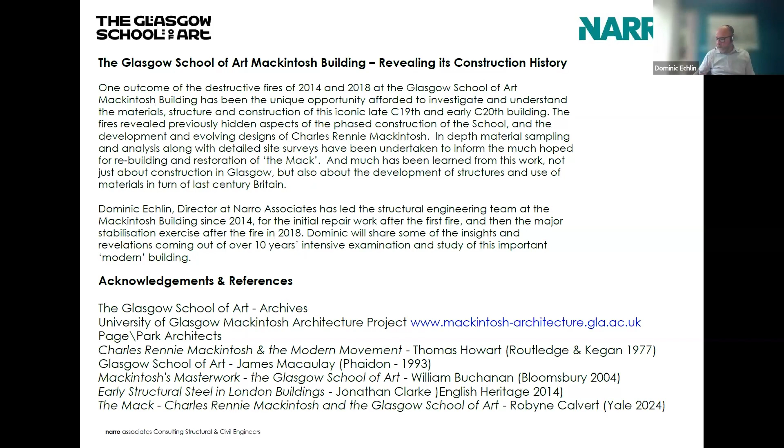In most people's minds now, sadly, the Glasgow School of Art is identified with the events of 2014 and 2018, the two fires.

And in some ways, I think certainly at the moment, such dramatic events perhaps obscure the building in terms of how interesting it is and its importance, not only from an architectural point of view, but also how interesting it is from a construction and structure point of view. So hopefully this evening I'll be able to take you beyond these rather dramatic and awful images to show you some of what remains, and also some of the fantastic information that we've gathered as we've worked on the recovery of the building.

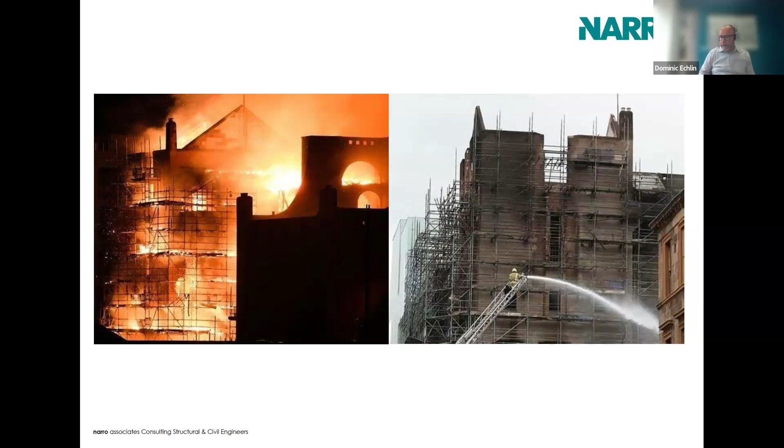The Glasgow School of Art as an architectural design has been recognised as being seminally important in 20th century and modern architecture for quite some time. In fact, it was Nicolas Pevsner in his book Pioneers of the Modern Movement, published in 1936, who was really the first person to recognise the importance of the building, in fact declaring it was the first modern building in Europe, which I think even at the time Pevsner was saying that might have seemed to be quite an unusual thing to say.

In most people's minds, I think we associate the Glasgow School of Art as being an arts and crafts building, harking back more perhaps to later 19th century design. But there are many elements of the design, and as I'll illustrate this evening, many elements of the construction and the use of materials that definitely place the building as being a modern building.

Slightly more negatively, Morton P. Shand said at about the same time that whilst recognising it was the most original architectural design of its day, he felt that structurally the building was behind contemporary engineering practice. I only recently came across that quote, and I think now that perhaps that's something that needs revisiting, because it's definitely not as a building that far behind much of the contemporary work happening both in Glasgow and the rest of the country.

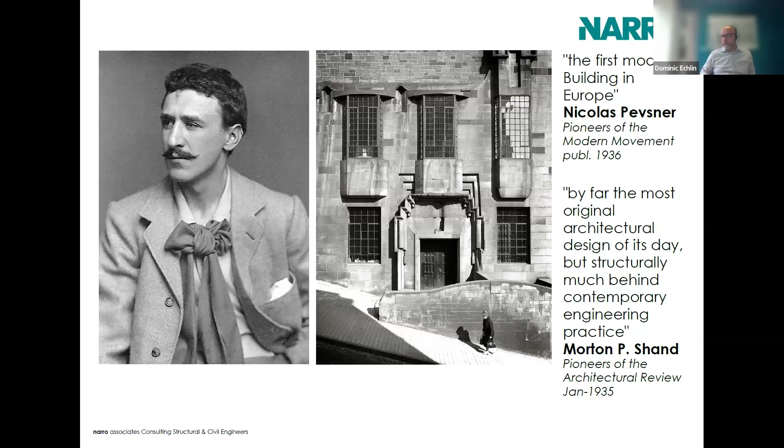And the fascinating thing about these studios is that whilst they were designed as separate spaces, they could in fact all be opened from across an entire half of the building into one single space. There's a very clever system of suspended partitions - the upper part suspended from the beams above, and the lower part entirely demountable, so that all of the studio spaces could be opened up into one large volume.

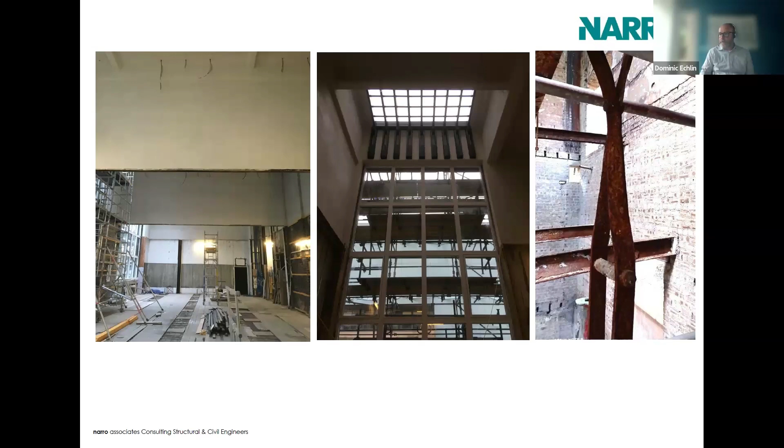As part of the work that we've done since 2014, we've done a huge amount of investigation of materials, and basically almost every single material in the building has been carefully identified and analysed in order that we understood what the materials were. Even our team going into the project made some assumptions that perhaps didn't turn out to be the case. The purpose of the material analysis investigation was to understand very clearly the properties of the material, to some degree how those properties might have been affected by the fire, so that we could then take that information and use it to inform the repair and recovery of the building.

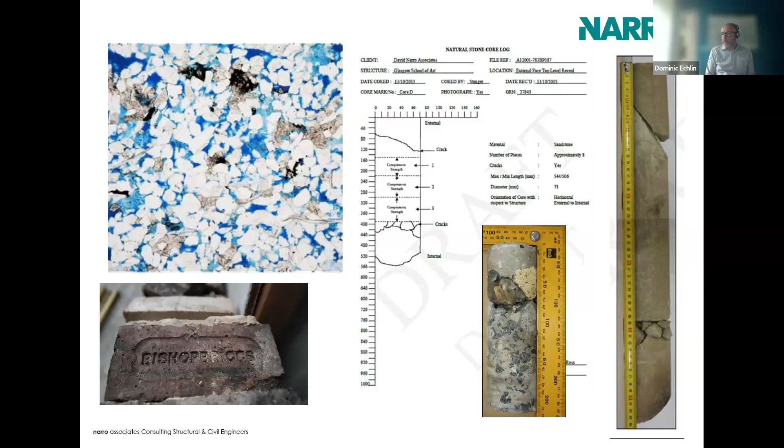I'll run through a bit of the history of the building, because it in itself is quite interesting. In the process of investigating and looking at the building, we've found some very good evidence of how it was built and developed during its construction. The idea of having a dedicated art school building for Glasgow developed in the 1870s and particularly the 1880s, at a time when Glasgow was booming as a city, and a recognised arts community was developing in Glasgow.

And so the notion of having a dedicated arts school, a new building, became increasingly important. It was seen perhaps not as we might see an art school today, as being just for artists producing work, fine art, etc. It was very much seen as being an important part of the commercial and productive development of Glasgow, having an art school covering all of the arts disciplines, not just orientated for producing art for rich patrons, but also for producing products and designs that could be used in Glasgow's manufacturing.

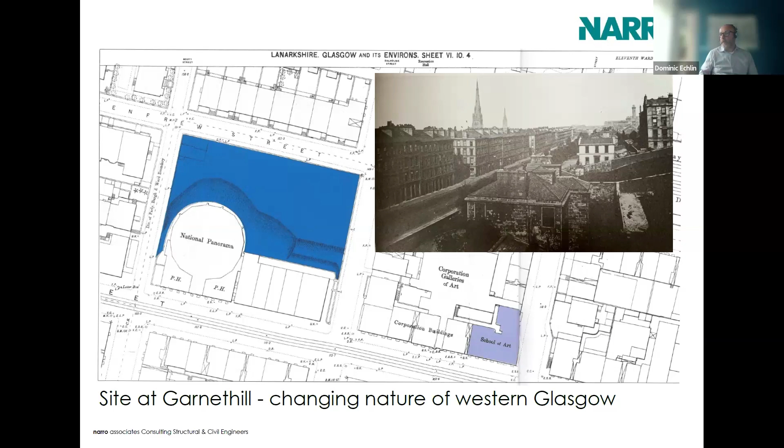The board got round this rather cleverly by saying, present us with an overall scheme and then tell us how much you can build for £14,000. This is why the development of the building then proceeded in a series of phases. The overall competition for the design of the full school was won by a firm called Honeyman and Keppie, but their chief draughtsman and the person responsible for the design was a young Charles Rennie Mackintosh.

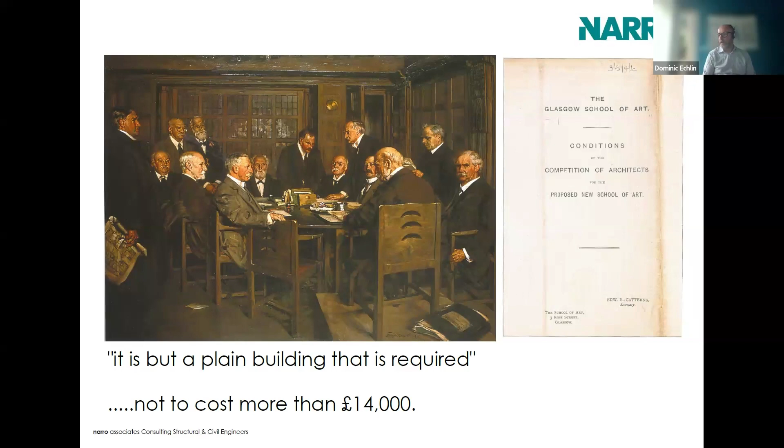These are some of the drawings he prepared for that competition entry - a full scheme for the whole art school, developed in quite a lot of detail, not just the external elevations but even some elements of how the building was to be constructed. You will see elements of this original design in the finished building, albeit that the design subsequently went through some quite significant changes over the 10 to 15 year period and the two phases of construction.

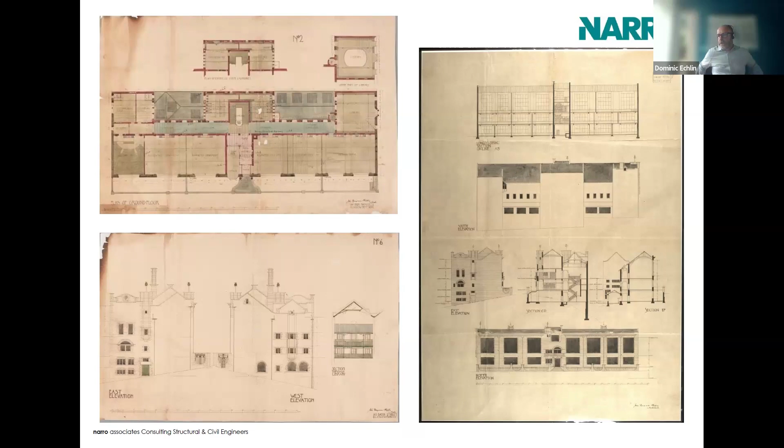Some of the elements of the design which I touched on earlier, marking this as a modern building, are there in that original design. Certainly the concept of these large internal spaces, uninterrupted spaces, generally north lit, were part of that original design. This image is of the architecture studio as finished, occupying the raised ground floor space on the western half of the building. This was typical of the large studio spaces that formed part of that original design.

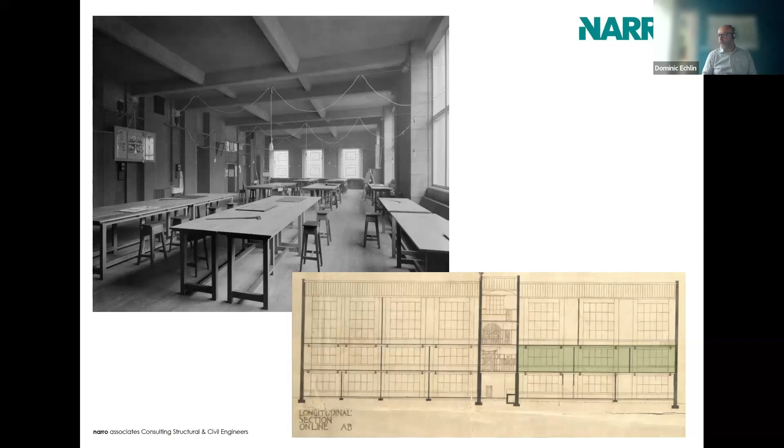As I said, there was this restriction on the budget. Initially the school only had £14,000, so they were forced to accept that the building would be built in phases. What Mackintosh was able to achieve for that £14,000 was construction of the eastern end of the building, the three-windowed studio spaces, the main entrance hall, and at the rear the southeast wing, which contained the original boardroom - the room that Andrew referred to - and the main gallery space within the building, which was often also referred to as the museum.

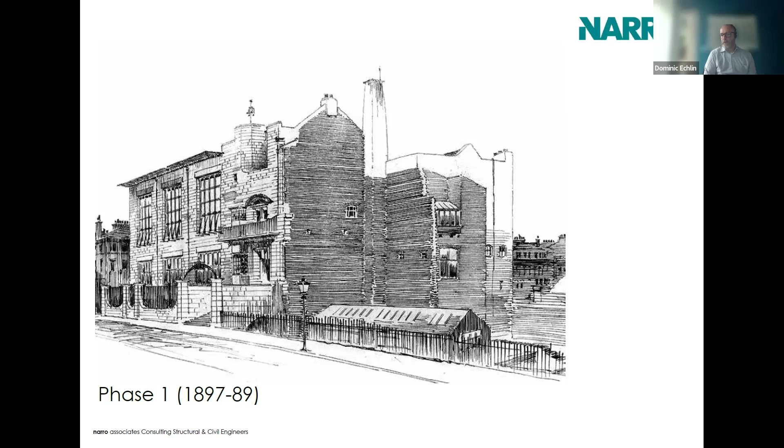The second phase of work progressed a little under ten years after the first phase, once the board had raised the further funds needed. This diagram usefully explains how that development was then completed across the second phase. It obviously included the western half of the building, but it also included some quite significant changes to the eastern half of the building.

In particular, as originally constructed, the eastern half had a timber roof, which was removed, and to match the western half, an additional story of studio space was added on top of the building. This was in part due to the success of the school and it needing more accommodation relatively quickly. To achieve that extra story, the existing timber roof was removed, a concrete filler joist slab was put across the building at what is now referred to as the second floor level, across both east and western halves, and the extra story of north-lit studios added.

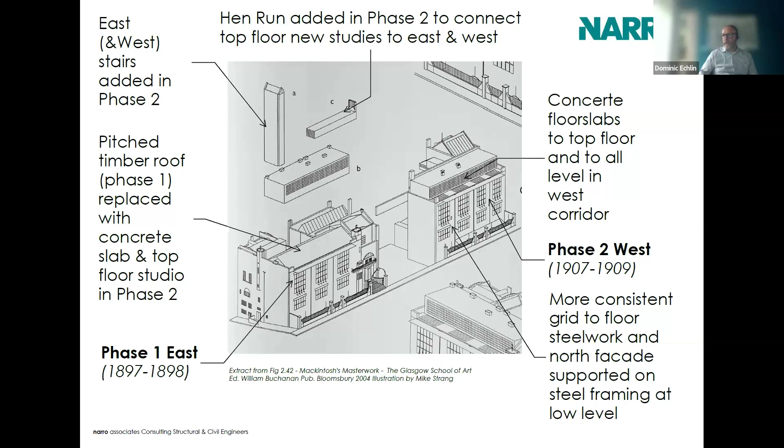The major change is a much more consistent steel grid to the floors in the western half of the building, and in fact part of the north facade actually supported on a steel frame of beams and columns at low level. So we're seeing over this period not only changes in the design of the form of the building, but also changes in how the building was actually constructed and the materials used.

So these are just a couple of images around that construction period. Interestingly, there were almost no images of the building during construction. There's an excellent set of high quality photographs, I think by a chap called Bedford Lemere, who I think took them originally for Country Life, or certainly they were used in Country Life magazine very early on. But we haven't really found any images of the building under construction, which I find interesting.

Perhaps it's because construction in Glasgow at that point wasn't thought of as being particularly out of the ordinary and therefore worthy of someone taking a photograph. But if anyone ever turns up a photograph of the Glasgow School of Art being built, I would be very, very interested. But these are a couple of early images.

One is a postcard showing just the eastern half of the building, and on the right is a rather nice Muirhead Bone sketch showing the library tower under construction.

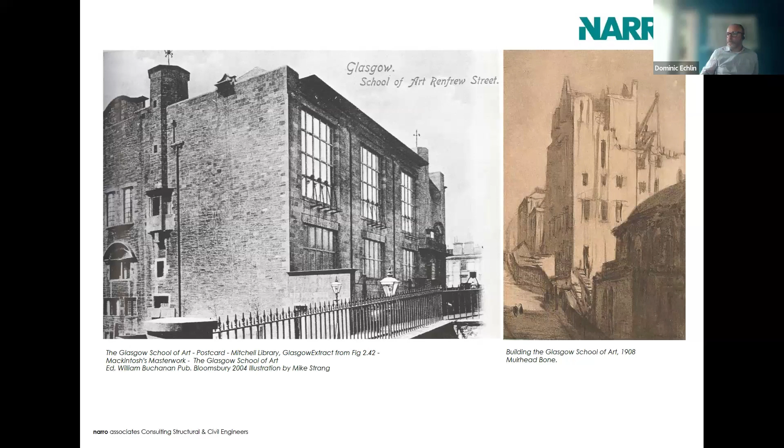And we can see some of the evidence of those sort of design changes in the building. Some of them were elements evident before the fire. The bottom left-hand image is in the east stair, where you had this rather curious arrangement of the east stair, which was added after the eastern half was built, sort of wrapping around what had been the external windows to one side of the director's boardroom.

But with the destruction caused by the fire, we can actually see more of the detail of the sort of changes in that same bit of wall, with original arched openings being altered and raised to form a doorway from the stair landing into the space. And with the removal, and in some cases the falling away of the finishes within the stair, actually the original external harling or render on that elevation around those now blocked over windows is still on the wall underneath the later finishes on the stairs. There's lots of other examples of these changes and adaptations to the structure and construction that have been revealed following the fires.

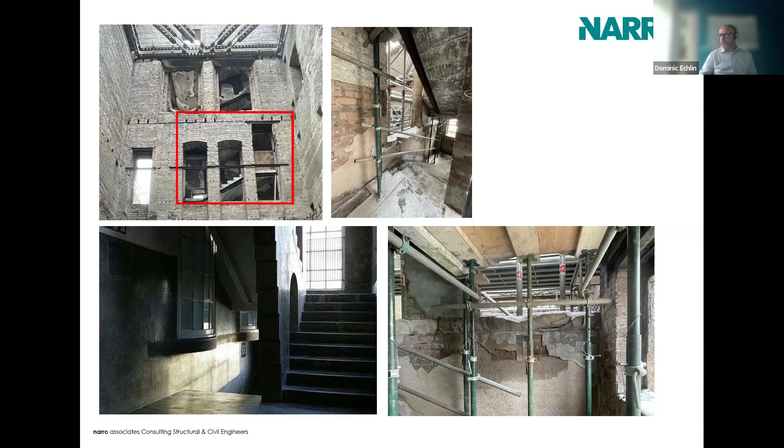One of the most interesting things I think about the building is the sort of various types of material and construction that are used in the building.

And unlike Mr. Shand's quote, I think this is very much a building of its time. As we've investigated the construction and the materials, it's become very clear to us not only was there a great deal of change and adaptation in construction practice around the turn of the 20th century in Glasgow, but that Mackintosh, as an architect, was evidently extremely interested in construction materials and technology, and was obviously very keen to use the most up-to-date forms of construction and materials that he could get his hands on.

The same also applies to other types of building technology. I haven't included in tonight's talk details about the electrical systems in the building and the heating and ventilation, because they are a talk in themselves. But Mackintosh was incorporating within the building and adapting the construction through those design phases, all these new materials and ways of building.

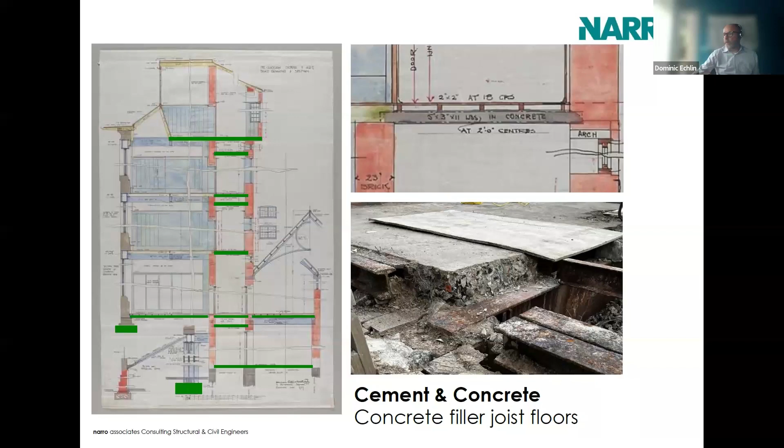What we also see in the western half of the building is that parts of the structure, particularly the north facade, are supported more on steel framing. There's more use of concrete in the foundations of the building, presumably because of the much increased point loads from those columns and frames.

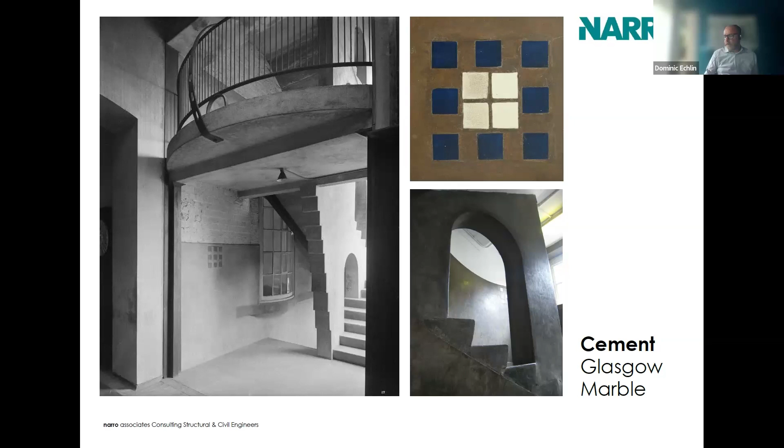The other key area where Mackintosh uses a cement material is on the south facade of the building. If you cast your mind back to that first slide where I showed the north facade, the south facade is radically different. It's been compared to a bit like a Scots tower house, in this extensive use of render, with only very little bits of stone at high level, and the render wrapping over window sills and wall heads.

For this exercise, Mackintosh uses almost a pure cement render, because at the time this produced this amazingly clean and unifying texture to the surface of the wall. Traditionally, this would have been done using a lime render, but Mackintosh wanted this very clean, uniform finish, and so he adopted a sort of almost pure cement material.

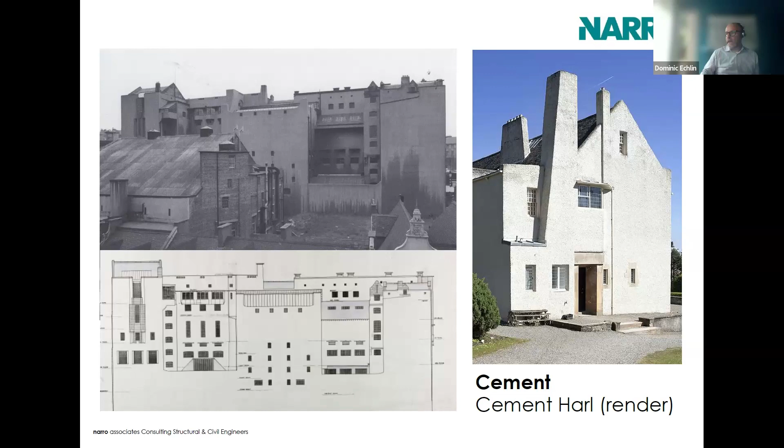This has caused a certain amount of problems, particularly at the Hill House, where they are struggling with the problems of damp and water ingress that come with using such a hard cement render.

One of the interesting changes we can see in the development across the two phases of the building is the initial use of cast iron to form some of the larger structural elements, particularly the lintels over the large north facade studio windows. There is only cast iron on the eastern part of the building. By the time of the building of the second phase, larger steel sections were commonly in use, so the use of these large section cast iron beams isn't followed through.

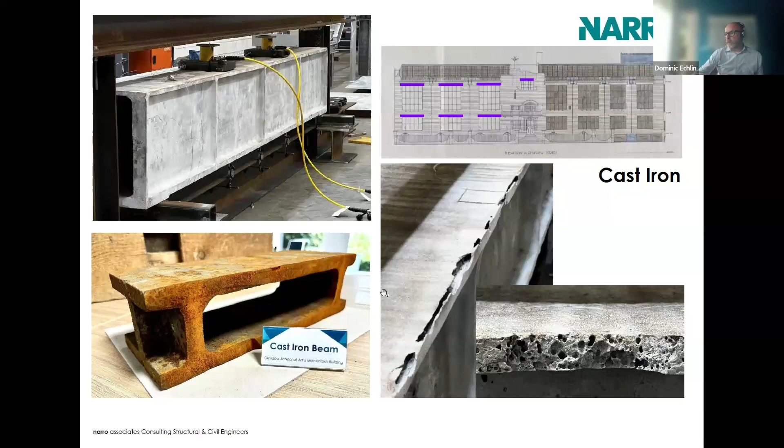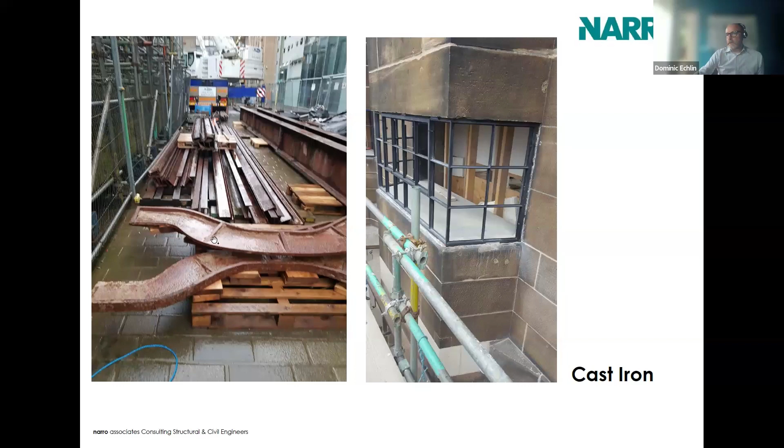We found some interesting use of cast iron in other places we weren't even aware it was there. There are a number of points on the building where there are windows with large cantilevering blocks of stone immediately above them. With the dismantling of parts of the facade at high level, we found, not immediately above the window opening but in some cases one or two courses above, carefully shaped pieces of cast iron acting as relieving lintels or supports to hold the projecting stonework above those window openings.

As I said, there is quite a significant development over the two phases in terms of the use of steel in the building. There is some steel used in the eastern half, although it was obviously limited by what was available in the mid-1890s. The main floor beams in the eastern half, supporting the studio floors, are steel, but they are fully compound sections made up of plates and angles riveted together.

By the time of the construction of the second phase of the building, we're seeing that very definite transition that was happening across the UK at the same time, towards a more formalized steel framing of buildings and use of larger rolled beam sections. Clearly the use of steelwork was an important element of Mackintosh's designs, and he wanted to push the use of the material, both structurally and architecturally. But this was part of a general transition happening not only in Scotland but across the rest of the UK at that time.

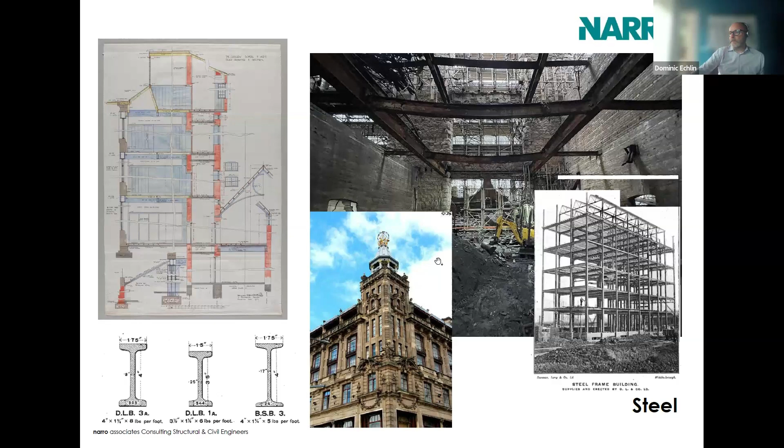As I said, Mackintosh in the second phase makes more use of steelwork. He supports the bottom part of the north facade on the western half on a system of steel beams and columns that allowed him to push the lower level studios out and occupy the basement area.

Clearly he wanted those exposed, using the steelwork in a decorative way. I haven't got an image here, but the one vestige of this use of exposed steelwork decoratively does appear in the studio where this roof was originally intended, in the form of T-brackets that support the timber trusses extending from the wall. Mackintosh takes the T section, cuts the end of the steel, and has it bent and sculpted into shapes that look a little bit like flowers. So he wasn't afraid of using the material, exposing it, and then taking that as a decorative element.

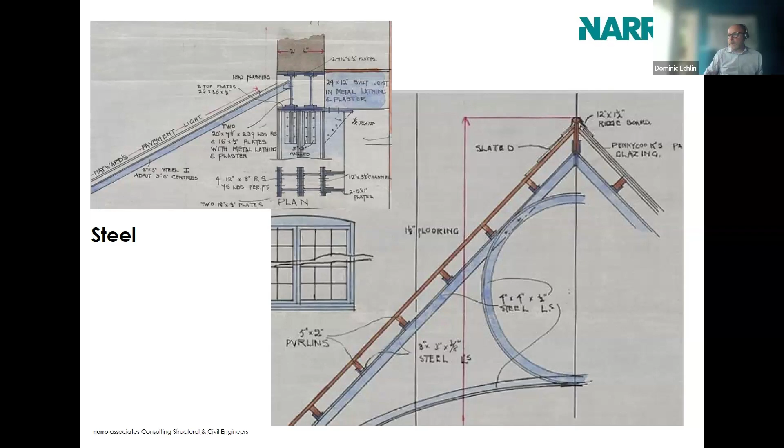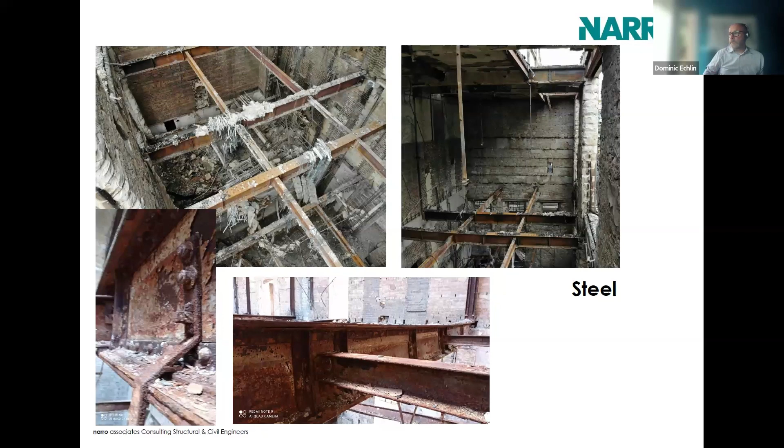The external image of the Glasgow School of Art, I think most people today would think of as rather traditional. It is a sandstone building, much in common with the vast majority of the buildings around Garnet Hill and throughout Glasgow and Scotland.

But Mackintosh chooses to develop his design and construct elements of the facade in a very different way from how they would have constructed masonry facades even well into the 20th century, particularly for the part of the facade around the tall library windows. Mackintosh adopted a form of construction that consisted of a jigsaw puzzle of large monolithic stone blocks, individually sculptured, to form the overall facade design. Rather than constructing it with just an external face of carved ashlar stone with a more traditional rubble backing, he adopts this large block construction.

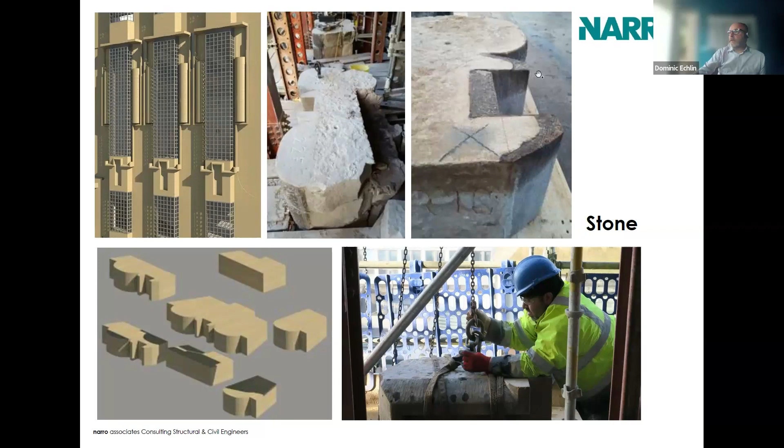One of the wonderful details that we found is in this block in the top right-hand photograph. You can see this little line. That in fact is the mason's original wax crayon line that was drawn across the stone, which allowed them to align very subtly each block one above the other to create the overall sculptural effect. A very nice little detail that we were able to find.

Not all structural, although there are structural elements, but particularly interesting, I think, are the windows for the art school, which again show that Mackintosh was following developments, particularly in materials and the use of materials, to form windows for the art school.

There's a variety of window elements on the building. There's obviously the large north studio windows. These are relatively conventional, despite their size - just made up of quite chunky timber elements. That part of the design was developed for the first phase and then continued in the second. It's more about the scale of the window and its relationship with the north light.

But with the development of the second phase, there were some more challenging window solutions that needed to be developed. With the addition of the top floor studios, Mackintosh incorporates this almost continuous glazed screen on the north side of those studios at the top of the building. These are also constructed in timber, but clearly this was pushing the limits of what a normal jointed timber window, even one very well built, was capable of.

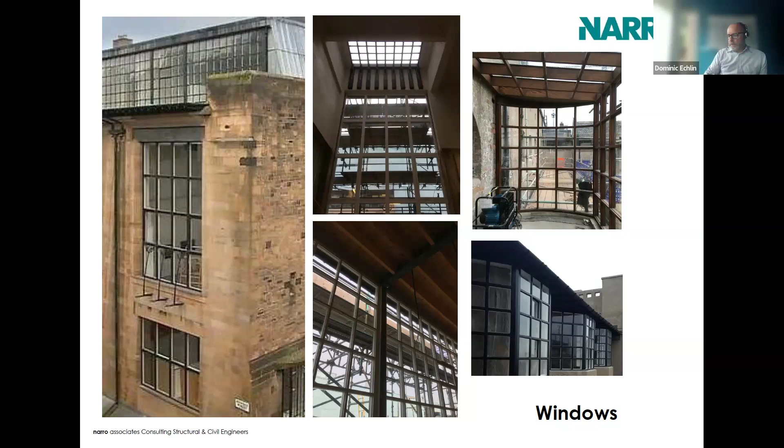By the time of the construction of the western part of the building, Mackintosh is venturing into using fully metal frames in its most adventurous way for the windows to the west facade, in particular the extraordinary windows to the library that sail over nearly 3 stories in height, made up of steel framed elements. The image on the left is actually the windows that replaced the original design.

The windows on the west were actually fully replaced in about 1948. The original design, shown in the center image, is a much finer steel section, using the individual sections and effectively stacking them up and connecting them together, really without any other form of frame elements to them.

Certainly very up to date, and obviously prescient of the kind of glazing solutions that were then adopted in what we might think of as the first modern buildings. A very interesting use of the latest technology, making that very much an element of the design of the building.

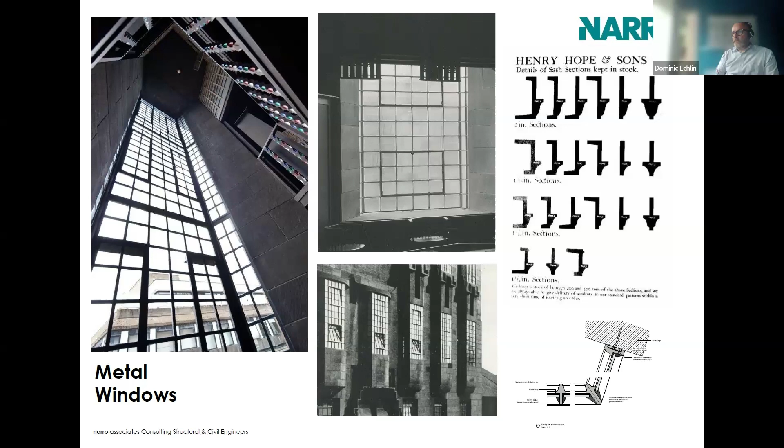That allowed us, with Page and Park, to construct a full 3D model of the library interior construction. And alongside this, we had a component list where we identified, I think there were over 700 different elements of timber that made up this interior.

At the end of the exercise, it was really only a handful where we didn't know the dimensions or how one element related to another. It was quite an extraordinary exercise, and the level of detail we got to was really impressive.

So what that enabled us to do was to undertake a reconstruction of that library interior, starting from that knowledge of what all the individual components were and how they were arranged. We spent a lot of time looking at how elements were fixed and connected. That proved to be very interesting because it wasn't as we quite expected.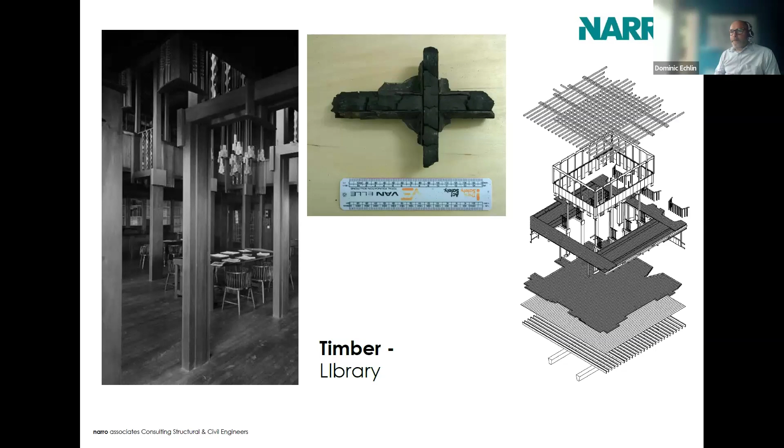I think a lot of people looking at some of the iconic images of the library interior would have assumed that it was a beautifully joined piece of timber construction - anything but. It was basically held together by a bunch of nails, with Mackintosh just using different rectangular forms of cut timber and simply bringing those together as an assembly. There's one detail with a sort of dowel connection to it, but almost all of the rest is largely nails, and the odd screw.

And only specific decorative elements like the balusters and the sort of carved pendants.

Another very interesting discovery was what timber the library was constructed from. A huge amount of archive research was done, poring through the original specifications, seeing how the specification was endlessly discussed at the board meetings, and how the original choice of timber, which was oak, was proving too expensive, with back and forth between Mackintosh and the board before finally deciding what they were going to use. Then when the test results came back from Trada for the samples we sent away for testing, it turned out to be something completely different.

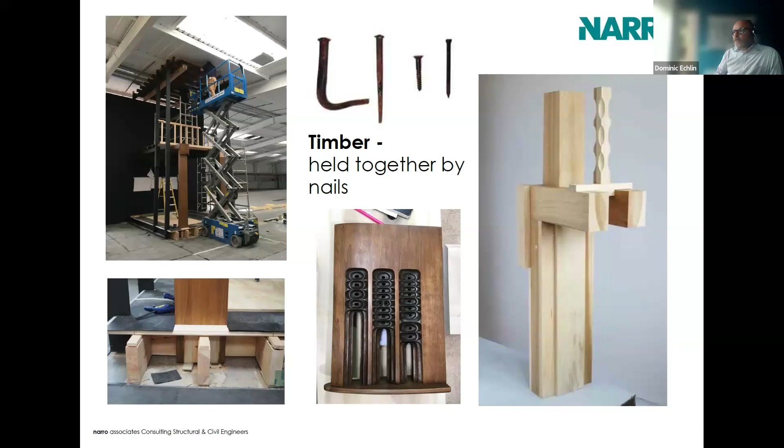But the consequence of that exercise was that we, with Page and Park, were able to develop the details, informed by that research and by the material testing and investigations done on site, to embark on the reconstruction of the library in timber. These are some photographs taken in the month or so just before the second fire, showing that library interior being reconstructed within the library space.

Including the suspended floor to the space above the library that also supports the library ceiling. And so that was where we had got to at the point of the second fire, in terms of bringing all that knowledge and information we'd learned about the building together to inform the reconstruction. Hopefully, and we're starting on what will inevitably be a much longer journey, that information can be brought forward into the reconstruction of the building a second time round.

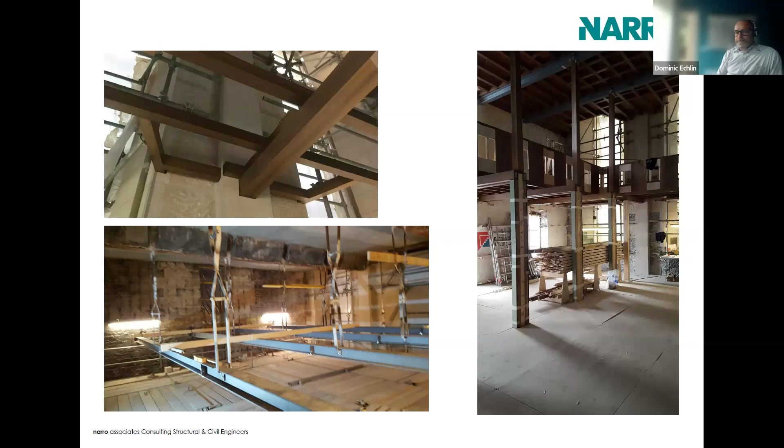Right, thank you very much, Dominic. I had never had an inkling that there was so much complexity of construction.

I did notice when we went round the library that the joinery was essentially all planted. All the sections were very simple rectangles, planted one on another to build up these complex forms. So, as you say, economic, but actually visually very effective.